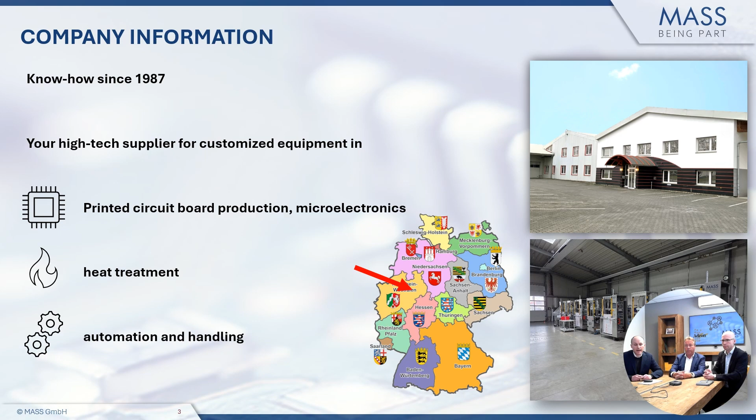Now I would like to hand over to André to talk about the really good partnership we have had for many years. André, your job. Okay, thank you very much both Max and Tim for inviting me and having the faith that I can bring a reasonable solution and a good presentation. Well, first of all, this slide is just capturing a few of the facts that we have with MASS.

We worked together since the year 2002, and there was heavy growth in via filling demand since 2005. What we saw in the very beginning was we recognized early that via filling was a technology that was going to grow, but at that time it was really for specialist type designs, higher complexity, so very low demand. But it has definitely increased, especially over the last 10 years, where process requirements have been growing due to PCB design density, and also with sequential buildups, also known as SBUs, buried blind vias, via in pad, etc. So it has become much more of a common process for most PCB fabricators today.

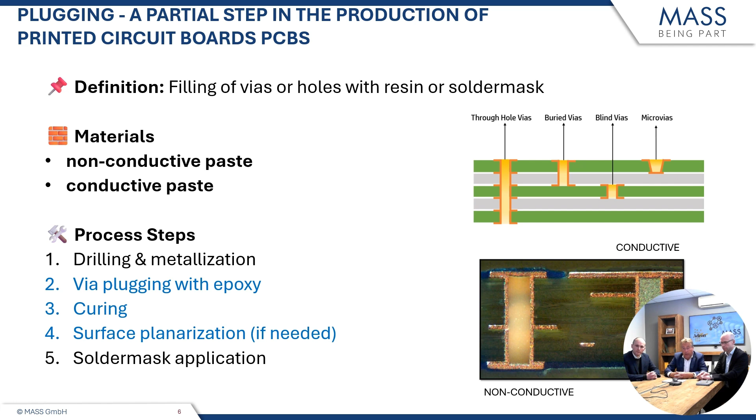One advantage we believe is that UL certification is not required. We get that question many times from customers, but UL serves different purposes and it's not required for the via filling. What you need to do for the process is drill only the vias that need filling. That is the best.

Additionally, we also see that there is a fairly wide spread in different diameters that we can fill in one single pass. But depending on aspect ratio of hole size and panel thickness, there might be some variations and some limitations to the process, which are very important to understand.

Prior to the filling, we've learned a lot, basically at Addion, where we do quite a lot of work with plasma for PCB, that plasma can also be used as an ideal preparation prior to filling, or baking the panel so that all the moisture is removed from the panel.

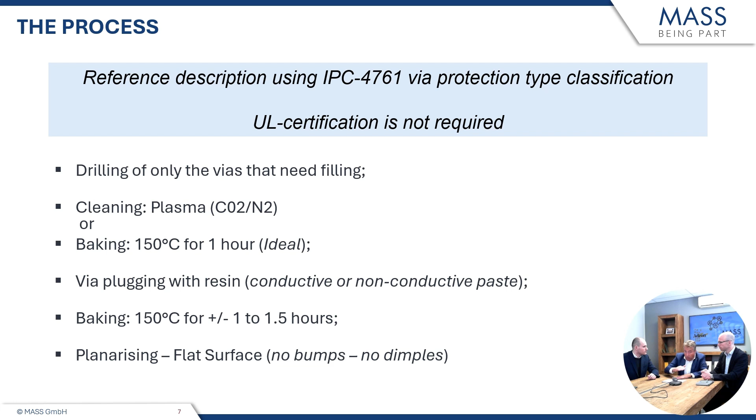Some important parameters, as mentioned earlier, are the aspect ratio, the hole, and the panel thickness. This is very important to understand what type of recipe is required for the machine.

In the MASS machines, the beauty is that you can set up an unlimited amount of different recipes, which describe the speed, the pressure, and the temperature, but also you can have different recipes based on the different resin types that you're using. For instance, a paste from Peters might be a little bit different than a paste from Taiyo or from San-Ei.

So it's really also important, and this is one of the key elements for us with the MASS machines, that we have the full chamber under vacuum.

Tim will later on go into a lot more detail about the true parameters and the true calculations and facts behind it. But for us, it simply means that if you can have a full chamber under vacuum at the maximum achievable air evacuation, this is a big advantage for the process, especially for blind vias.

Because you're not pushing it through, your paste has no way to escape. It has to go in, but the air has to be out completely. And with that, the filling speed is important, and these can be defined by type of panel, aspect ratio, but also the size, number of holes, etc.

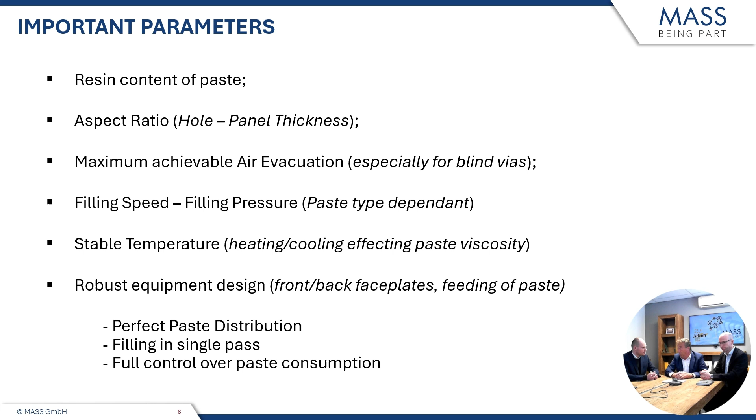of the faceplates that we are using for the filling in the heads. We call them the faceplates. Also the feeding of the paste, which we always strive for perfect paste distribution, and achieving it in a single pass, and to keep full control over the paste consumption. But it means you have to have a real even distribution of the paste over the whole panel, and that's what we also achieved with the new developments, which Tim will elaborate on further in the next coming slides.

So the right hand side part is really the vacuum chamber where the filling takes place. Once the filling is done, the panel can be removed and located into the scavenging to remove the first layer of excess paste prior to putting the panels in the oven.

On the right top side, there's a fairly special development, making use again of a full vacuum chamber, but allowing also, with the use of stencils, to have selective filling. Especially in some high-tech, high-end applications in Asia, and also some in Europe, linking more even to semiconductor type industry than to printed circuit board, we see that selective filling is something that is also seeing a growing demand.

Then on the bottom side, we have the VHF 3000, which is also a single-sided machine with a single head, in which you can also choose the type and size of head that you'll be using.

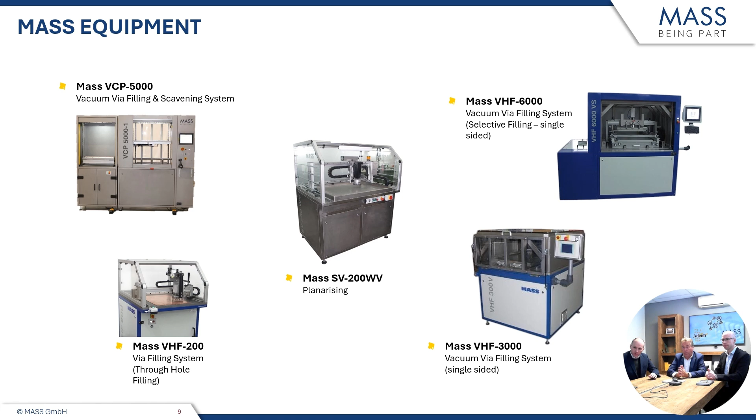I would like to go on in the next slides to highlight a little bit our VCP, our vacuum chamber plugging machine, and explain you a little bit. Andre started already with it. Now I will go a little bit more in detail and explain you all the areas and the functions of the machine. So how it works.

So what you see, Andre mentioned it already. We are talking now about this machine here. So we have here a complete vacuum chamber.

The PCB board is moved inside the vacuum chamber in the first production step. We have top clamping, so the worker takes the PCB board, moves it inside, and clamps the board. Then we close the door of the machine. It's a fully PLC controlled machine, so a complete automatic process. We close the door as a next step, and then we pull a vacuum.

Depending on which type of boards you want to plug, as Andre already mentioned, you can define in the software the vacuum level which is necessary. It also depends a little bit on the paste you're using. So you pull a vacuum first, and this is a very important step which I want to highlight, because we extract all the air and also a little bit of the moisture from all the holes inside the PCB board. This has a huge impact and effect on the quality at the end of the plugging. So now we pulled a complete vacuum inside the chamber, and extracted all the air from these holes.

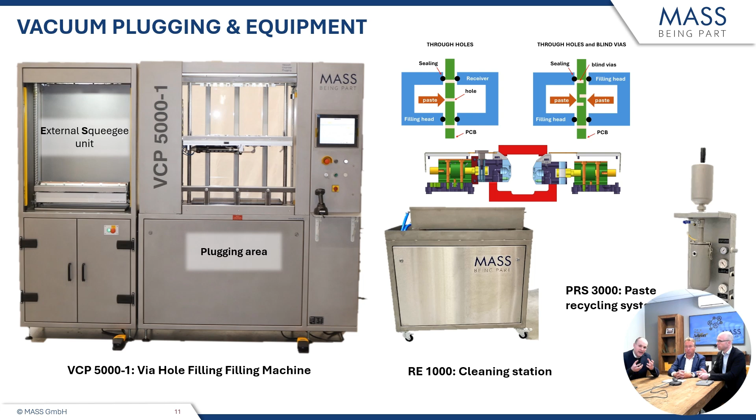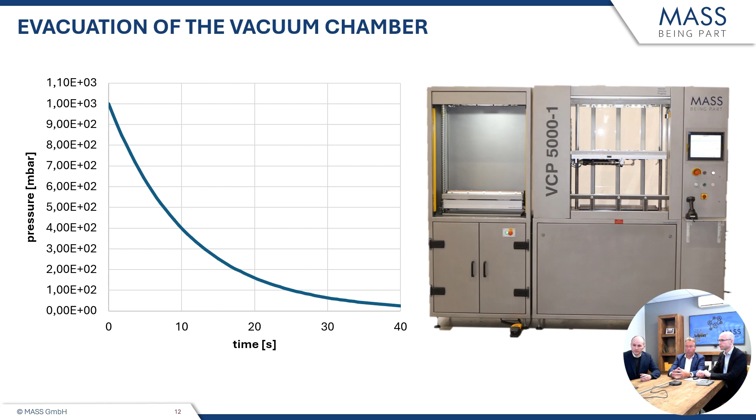Tim, now I would like to hand over to you. Please give us some insights into some basic vacuum technology and also the physics behind it.

Thank you very much. First of all, I want to thank André. It's really a big pleasure for us to have such a partner on board. This is very important for us, and for how to improve a machine. Improving a machine only works if you really listen to the needs of your customers on site, and this is where André helped us so much over all these years. We will also present a new generation of our VCPs, which Max will do at the end of the webinar. But I want to use this opportunity to really say thank you for this partnership over many years. It helped us improve the machine step by step, and I think that's where we are now, prior to launching a new generation of machines, which would not be possible without André. If I may quickly interrupt, also, it takes two to tango, Tim, so it works together.

But before we go to the new machine and its new features, I want to go back to basics. What are really the basics of vacuum technology, which is really the key of our VCP machine, the full vacuum chamber, which was mentioned by Max. I want to go back to the physical basics of vacuum technology.

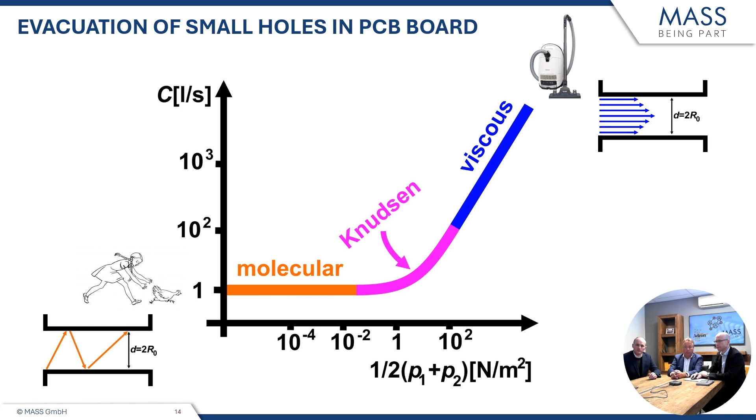So I made some simulations. And of course, at the beginning, I said the evacuation is very fast. But in this intermediate range where we do the plugging, it starts to become slower.

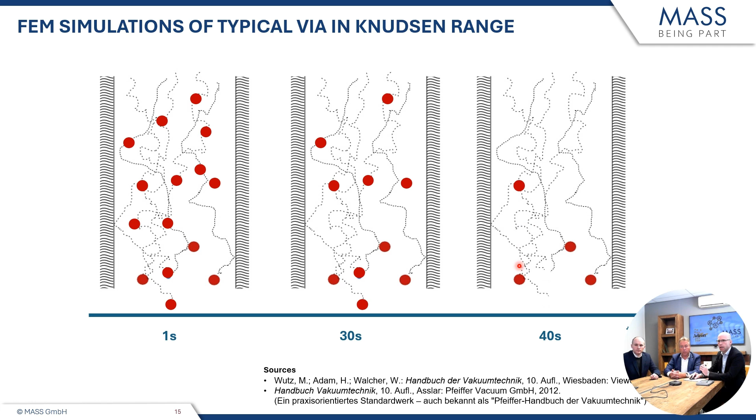And that is why we at MASS developed the full vacuum chamber plugging, because we really say you need to give some time for the air molecules, and more important, for the moisture, for the water molecules to be removed from the hole. This is, I think, the most important message I want to bring over, that it takes really time to get rid of those molecules. There is no way around that.

And this leads to several advantages for the MASS VCP machines. So why do we use the full vacuum chamber? Vacuum technology is not so simple - you need to have some basic understanding, you need to have some, let's say, technologies to enable vacuum inside your machines. But the advantages are very clear.

Max showed the evacuation curve, and he said that approximately 40 seconds our via holes are under vacuum before we start the plugging. And of course, compared to if I have a vacuum only locally applied to a hole, where it's maybe subjected to a vacuum for 1 or 2 seconds, of course after 40 seconds I have less molecules inside my via hole. And what does less molecules mean? What is the number behind?

And the number behind is huge. After 1 second, you still have 1.696 trillion molecules inside a typical hole of 0.3 millimeter diameter and 2.4 millimeter thickness of the plate. Inside the MASS machines, you can subtract 1.679 trillion molecules from this number. So in the MASS machines, you really have trillions of molecules less inside your hole.

So what plugging do you want to do? I think the answer is very simple. Of course, this has also some other effects.

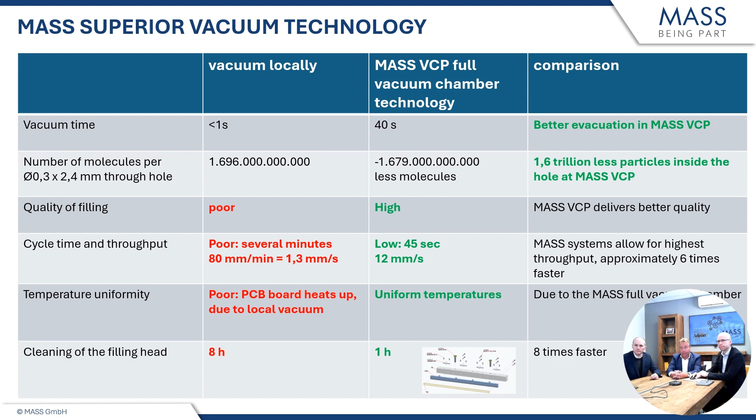So the big question is, the easy answer would be: the better the vacuum, the better my plugging result. But there is also another effect.

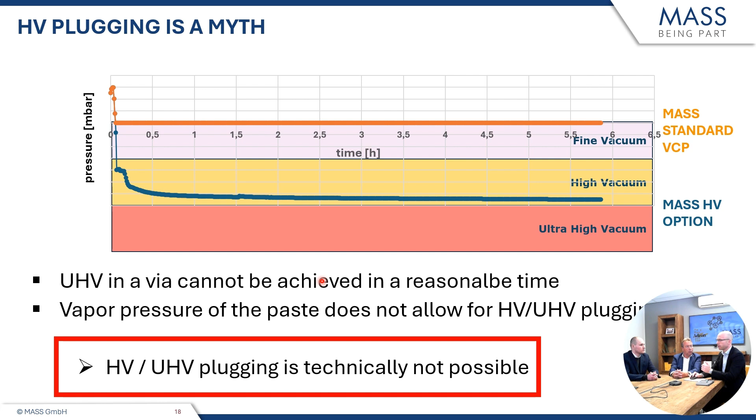So you can adjust the vacuum level to your process, to your paste, to get the optimized results. There are two reasons why ultra high or high vacuum plugging is technically not possible. The first is it cannot be achieved in a reasonable time. We want to plug our plates, we don't want to wait forever. But the second argument is really the vapor pressure of our paste.

Tim, thank you very much for these insights and explanations about the physics behind the new machine generation. We will call our VCP M+. So this is really the next level of vacuum plugging.

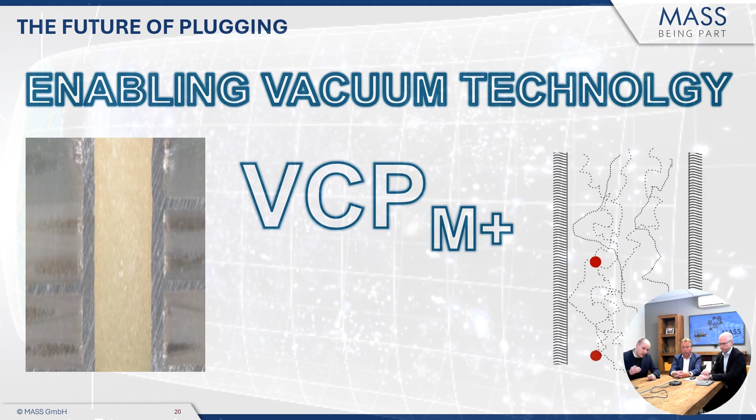What are the improvements? We worked hard with our team to reduce overall the paste consumption during the plugging process. This is very important for you as a user of the machine because buying paste is an expensive point, and when we can reduce the paste at the end, you will have a huge benefit here. We also worked on the improvement of the vacuum, especially vacuum sealing and so on.

So we did hear a lot that the new machine brings you a lot of benefits from the vacuum technology side. A big improvement will also be our new software generation of the new VCP M+. So you have a lot of possibilities in the future to monitor your plugging process, to analyze the paste consumption after a plugging process, and so on.

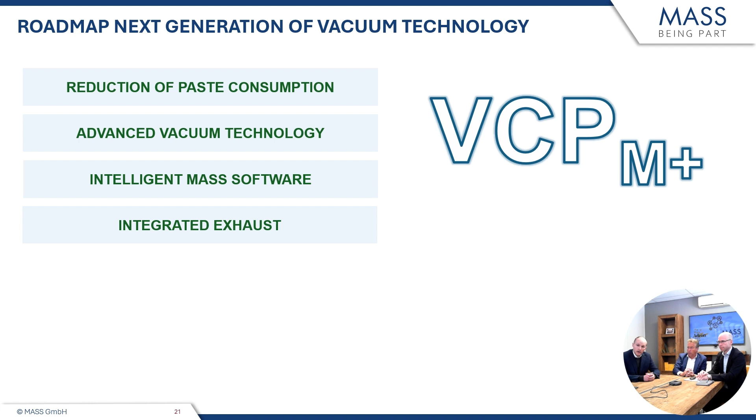But all these details we will present together with André and Adeon at Productronica this winter in Germany. So please visit us in Hall B3 at our joint booth where you find MASS and also Adeon. There you see the machine first of all, and you have also the possibility to get in touch with us, and we explain all the new functions and features of the machine.

If I may quickly add, also what we learned with the new software - very fashionable words, Industry 4.0, 5.0, but also MES systems - the new software really enables us to have a lot of traceability of all the parameters, to be able to pull them out, to analyze them further, but also in the future to connect further to manufacturing execution systems. An important point to highlight.

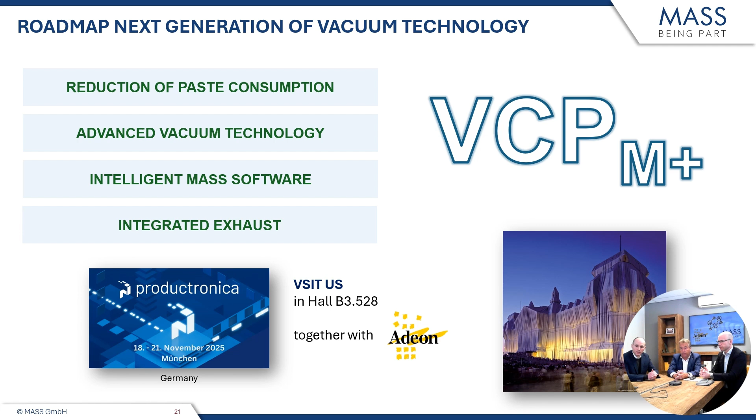On this slide you see some first insights of the new software. The new software will be very, very easy to use. The user interface is designed to operate very simply, and optically you can directly select sections of the machine - you don't have to read many manuals. The software is very intuitive and easy to use.

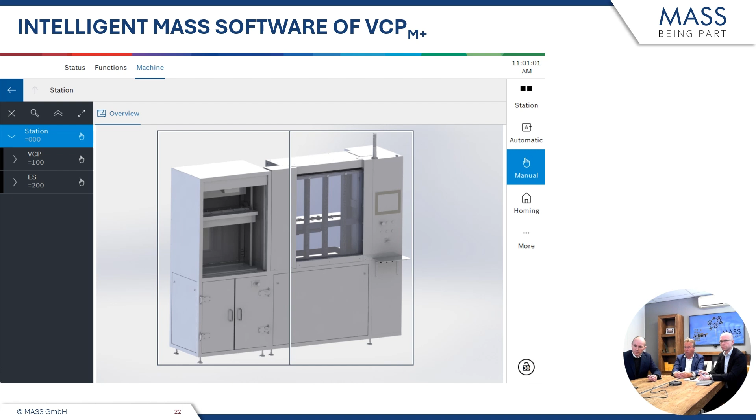As we said a couple minutes before, the software will also help you reduce paste consumption. The software will give you insights into all the process parameters which were generated during a plugging process. So you can see directly in front of the machine, and also afterwards in data recording, which pressures you have used for a plugging process, which traverse speed you have used. It's really an easy and nice overview for optimization and also for process control at the end.

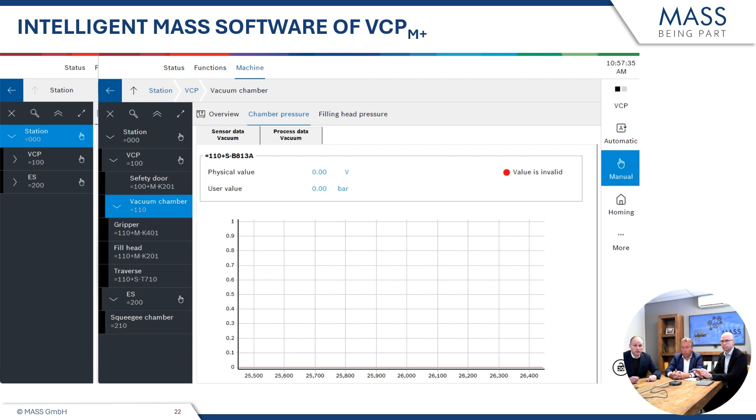And with this slide, you also increase the traceability. All these little new features in the software are really the result of many discussions and many developments that we've had over the last while.

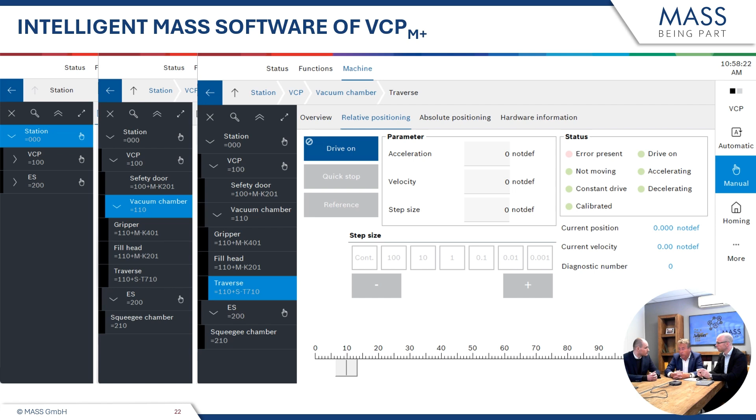We would also highlight one important point: our new MASS demo center in Germany. We already had a lot of customers in our demo center, and this demo center is for you. So you have the possibility to come over - you're very welcome to visit us any time to make trials with us on the machine.

You can bring your panels with you, and we do it with the paste you want to have - we have all the common pastes available at MASS. In the demo center we can really do application development, process optimization, feasibility studies, and so on. So we can do plugging, we can do the curing steps, and also the planarization steps. All the machines are available.

The customer feedback was really good because with these tests in advance, customers have the possibility, first of all, to see the machine before purchase, to check the quality. So this is really for both sides a really good chance to optimize, or to see the machine.